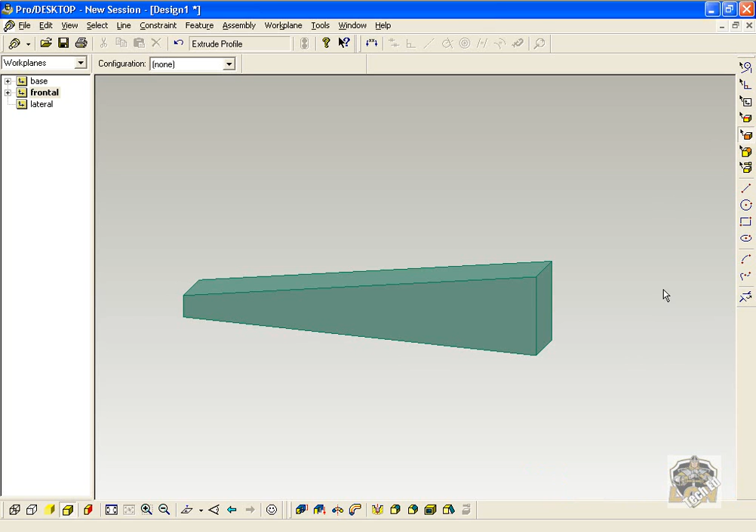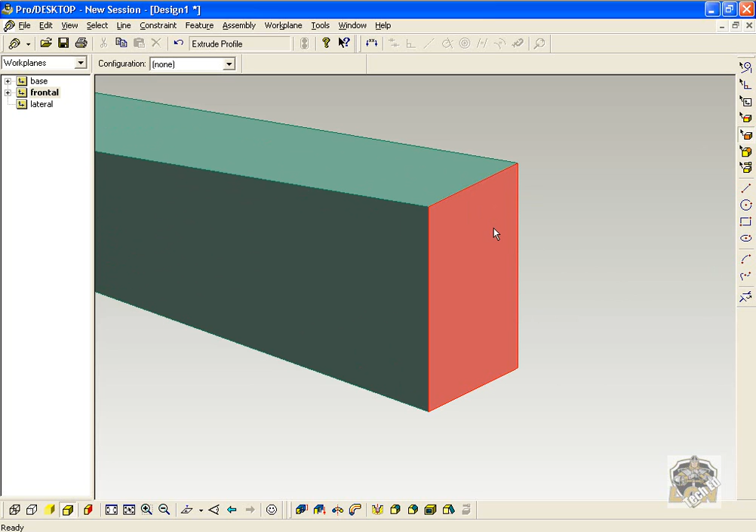First we're going to select a new face, so we're going to draw on the back end here. I'll rotate it around, hold shift and roll the mouse ball to zoom, and click this face. I've selected the faces tool on the right hand side, hotkey F, just hit F to bring up the faces tool. I'm going to draw on that, putting another piece of paper on the back end.

So I'm going to right click and hit new sketch. Right click, new sketch, and then you can put cartridge, hole, holder, something like that, or you don't really have to give it a name. Then I'm going to hit Shift W to look directly at that work plane, so all the measurements are very easy to see.

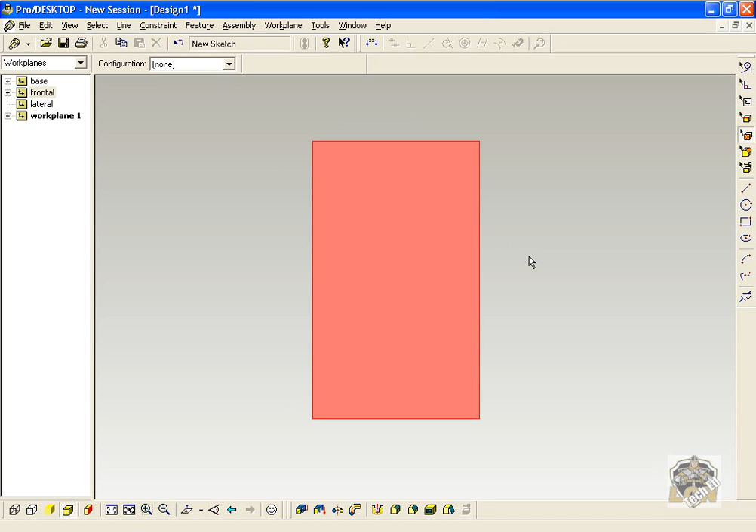So what I'm going to do is just draw a circle. I'm actually going to stay away from what's called the origin because it's not dead center. So I'm going to draw it just up a little bit because we're going to move it around, and it doesn't matter the size. We're going to size it and locate it with the dimension tool.

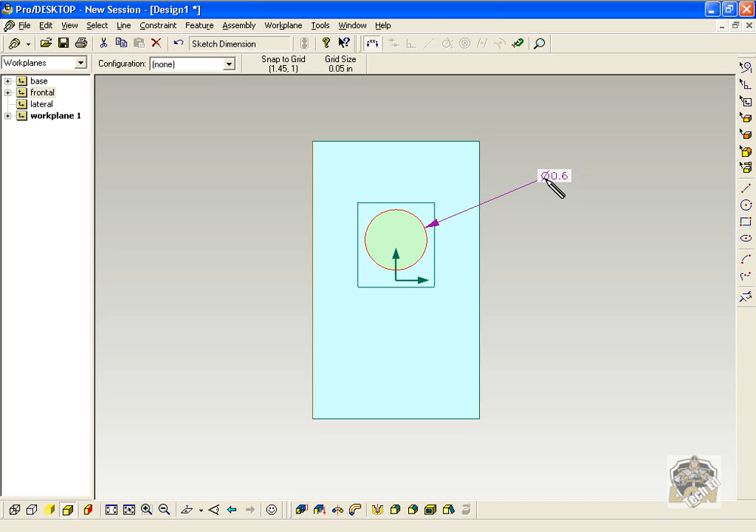So first let's size it. Click the dimension tool, click the outside edge, and drag a leader line out. That little symbol is the diameter, the circle with the line through it. I'm going to double click on my 0.6 or whatever you have, and the diameter is 0.75, so 3/4 of an inch. Hit OK, so that'll size that to the right size.

Now let's locate it. There's two ways to locate it, up and down and left and right. I'm going to click on this circle again, and notice that little black dot pops up in the center, meaning I want to reference the center of the circle. It's very tricky, if you move a hair out to the edge you lose it, so I wait till it pops up. I click, then click on the bottom line and drag a dimension out. I even missed it that time, see, it went to the bottom there. So undo, I'll start at the bottom again and wait for my center dot to pop up. There it is, and I click, holding down, and drag a line out. That's going to allow us to dimension the height of the circle, because we need to get the center.

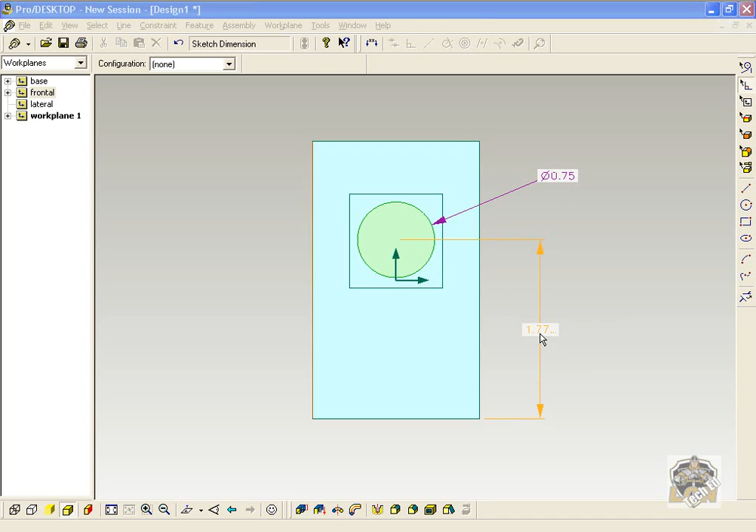I already did the measurements, and the height is 1 5/16. It's a little bit of a small dimension. 5/16 in decimal form is 0.3125, so it's 1.3125. Notice that is not at the origin that they give us, that's why I wanted to stay away from it.

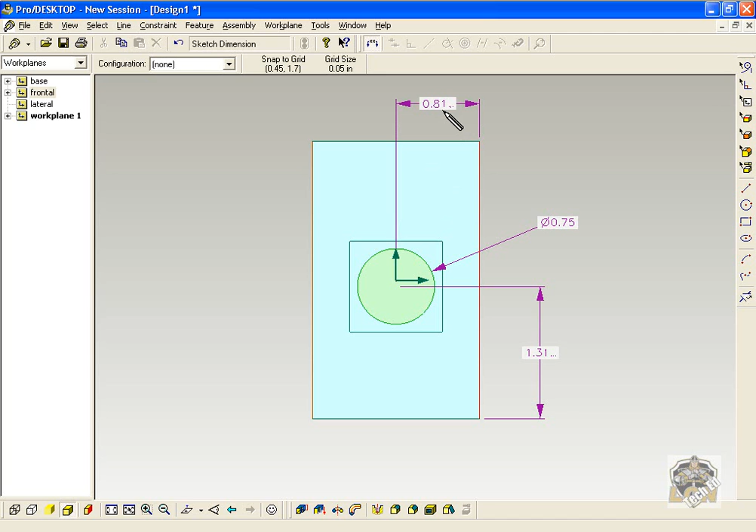Now we need to do the same thing going left to right. I'm going to click on the dimension tool again. This time I'll grab the right hand side of the car body, the line turns red so I have that activated. Then I bring it down to the circle again and wait for that center dot to pop up, there it is. I click and drag my dimension up, and that is 13/16, or in decimal form it is 0.8125. Oh look at that, lucky day. So hit OK.

I'm fine with that, and now we have the circle centered, but it doesn't get us the cutout, it just gets us a circle.

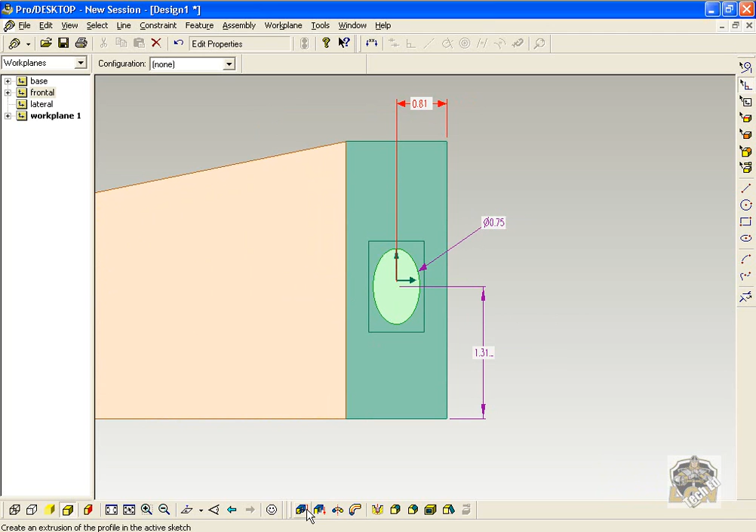So we're going to go back to our friend extrusion, and go to the shortcut bar at the bottom, the very first option on the shortcut bar. I click and it brings the bottom menu up. That cut is 2 inches, so somebody drilled out a hole 2 inches in the manufacturing process, well, it's not cut into it. So I want to go subtract material, and go below the work plane, into the part. Subtract material below work plane, distance of 2 inches to create the cartridge holder, and then I hit OK.

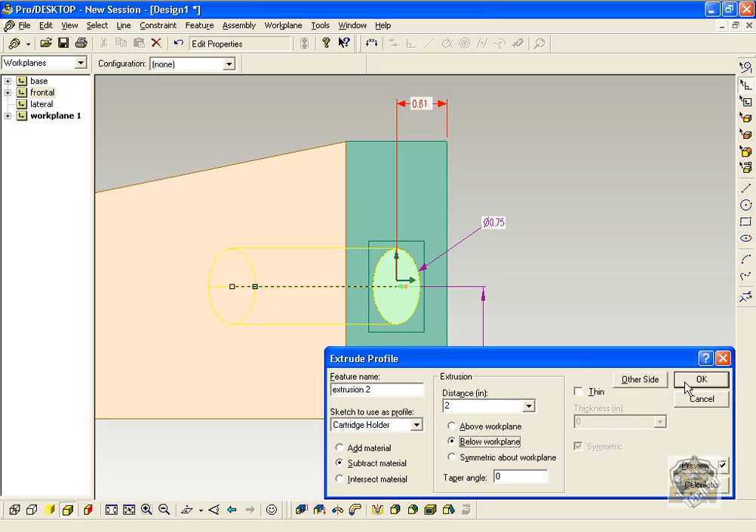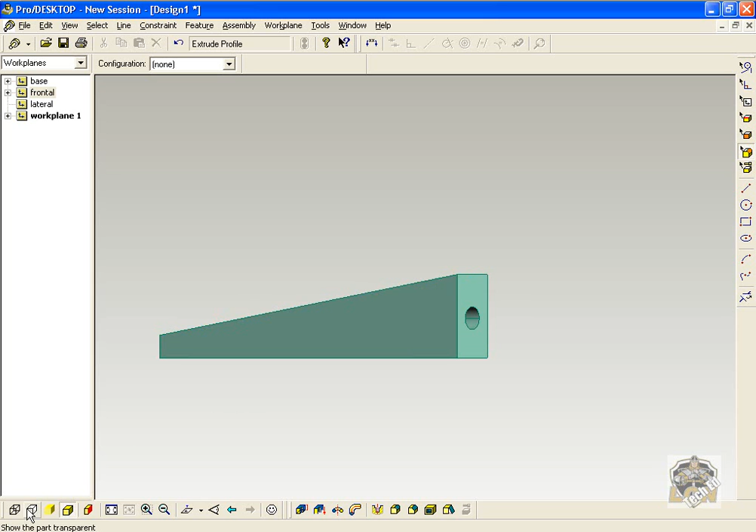As I mouse over it, it highlights the feature. One of my features is the extrusion of the body, another feature is the extrusion of the hole that's cut out. I can go down to some of these wire views, like transparent wire view, so it lets me see what's going on inside a little bit better.

Alright, so that's video 2. We'll come back with video 3 and do the axles.